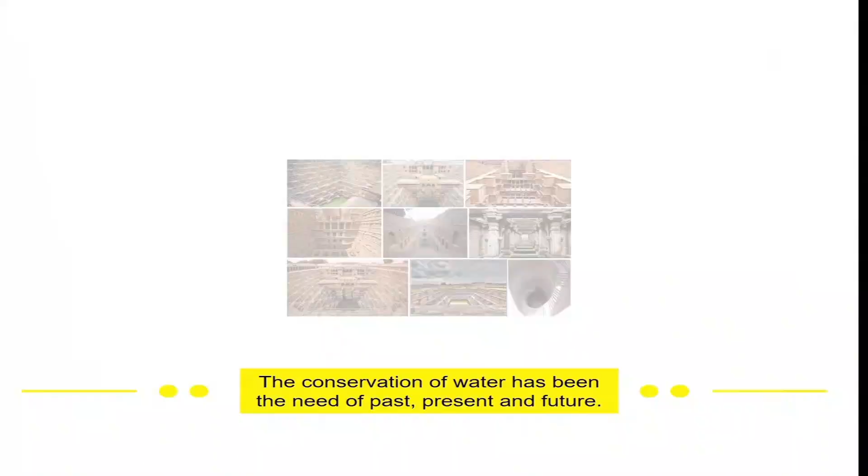Welcome to the Central Soil and Materials Research Station, CSMRS, an office under the Ministry of Jal Shakti, located in New Delhi. What is the most fundamental necessity of life? It is water, the essence of existence, the foundation of development, and the heartbeat of civilization. Water conservation has been a necessity of the past, a demand of the present, and the hope of the future.

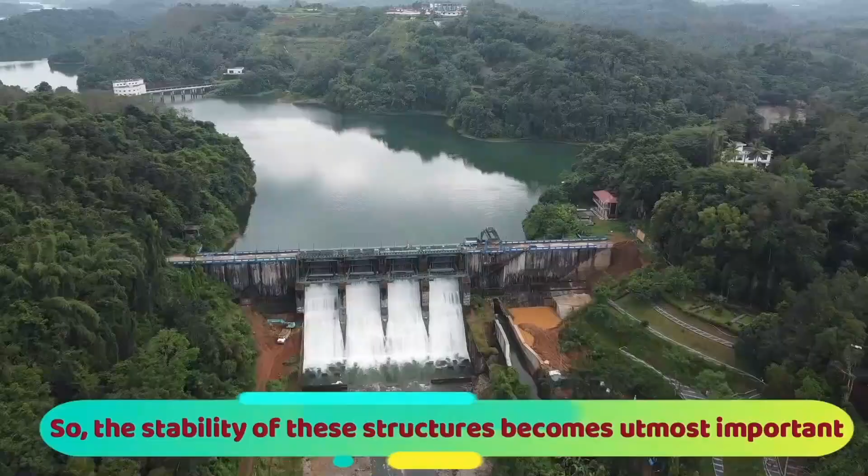To ensure the water and energy security of our nation, the stability of water resource structures becomes paramount. With this perspective, the Government of India established the Central Soil and Materials Research Station, CSMRS, in 1954 in New Delhi as the Soil and Materials Directorate of the Central Water Commission, CWC. Since its inception, CSMRS has served the nation through research, consultancy, and testing services for various water resource projects in the country and neighbouring countries.

On the recommendation of the high-level committee constituted under the chairmanship of Dr. M.S. Swaminathan, CSMRS was separated from the Central Water Commission in 1981 and made an attached office under the Ministry of Jal Shakti, Department of Water Resources, River Development and Ganga Rejuvenation.

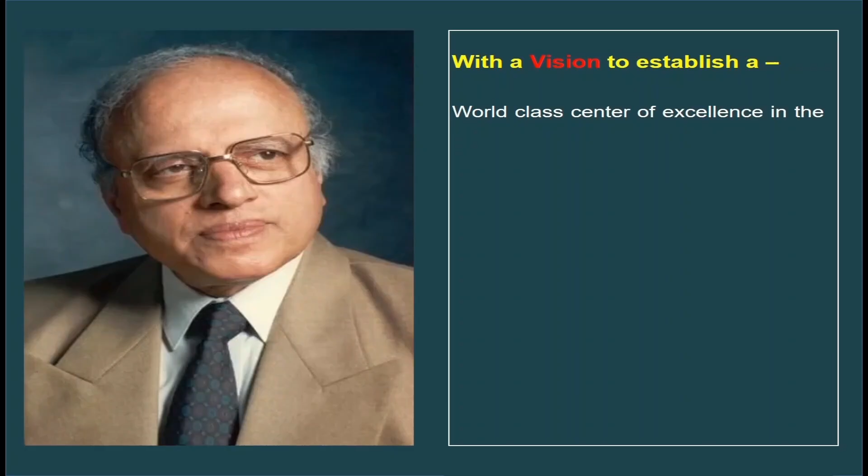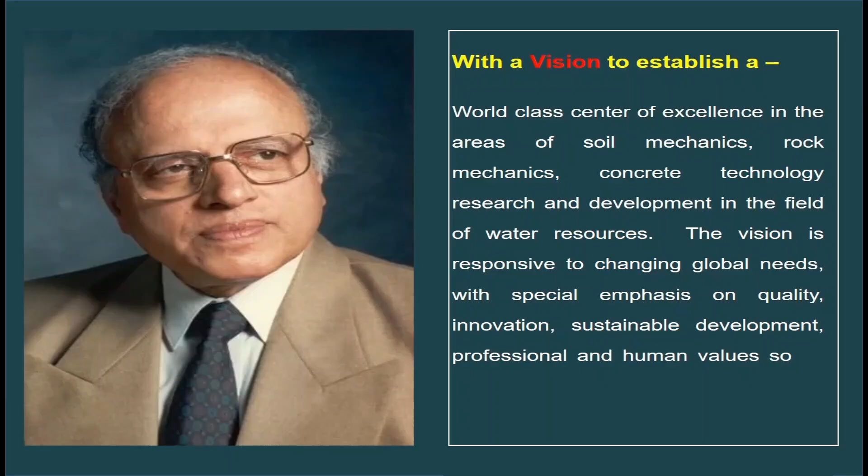The vision of CSMRS is to establish a world-class center of excellence in the fields of soil mechanics, rock mechanics, concrete technology, and water resources research and development. Its vision is to be responsive to changing global needs with an emphasis on quality, innovation, sustainability, and professional and human values, so as to make an effective contribution to public welfare and socio-economic development.

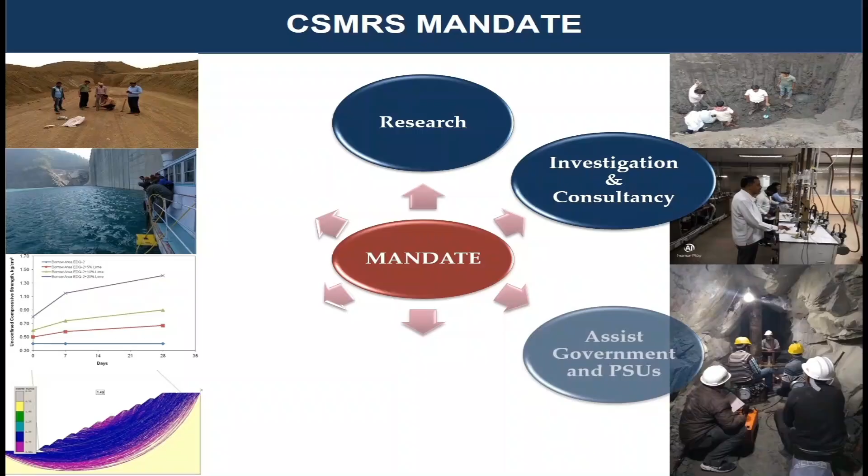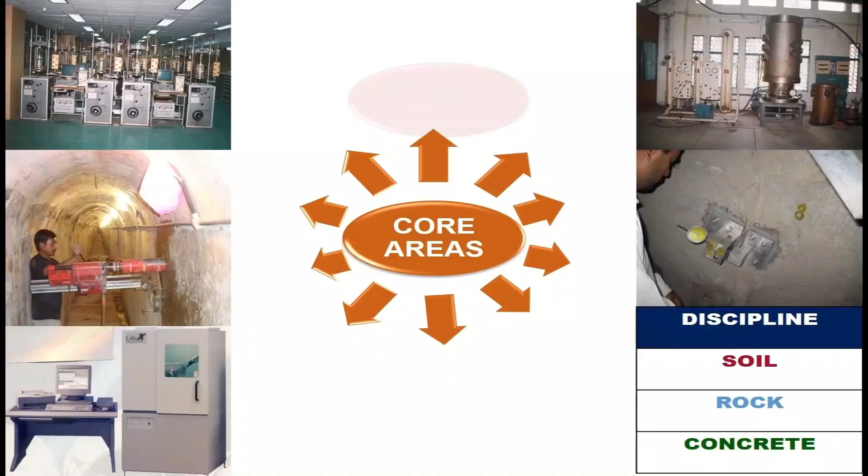The activities of CSMRS relate to research, testing, and consultancy, providing assistance to government departments and public sector undertakings. In addition, it also undertakes training, dissemination of information, and academic collaboration with universities and research institutions. The main areas of work include soil mechanics, rockfill technology, geosynthetics, soil dynamics, rock engineering, geotechnical instrumentation, concrete technology and chemistry, numerical modeling.

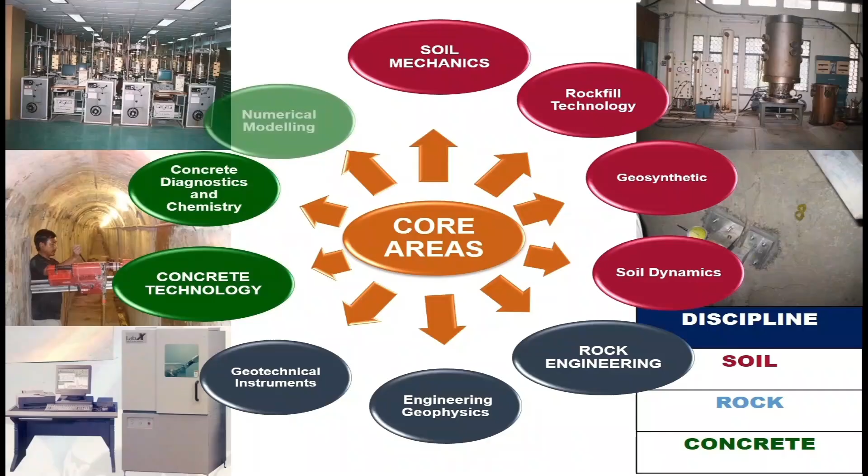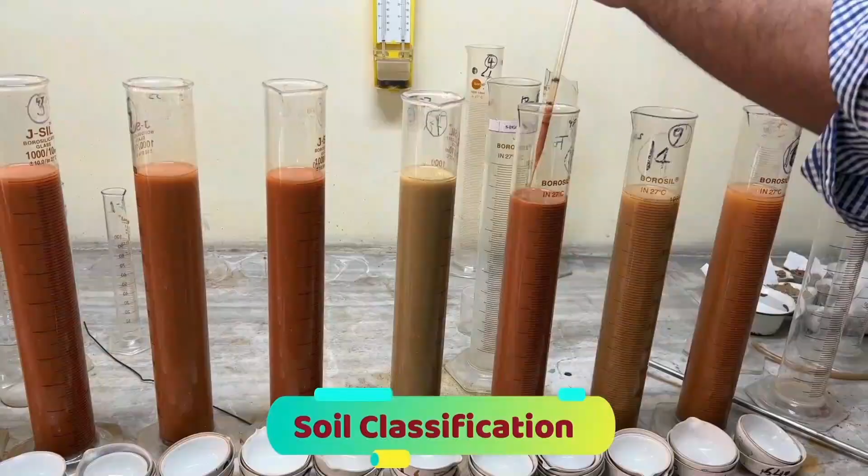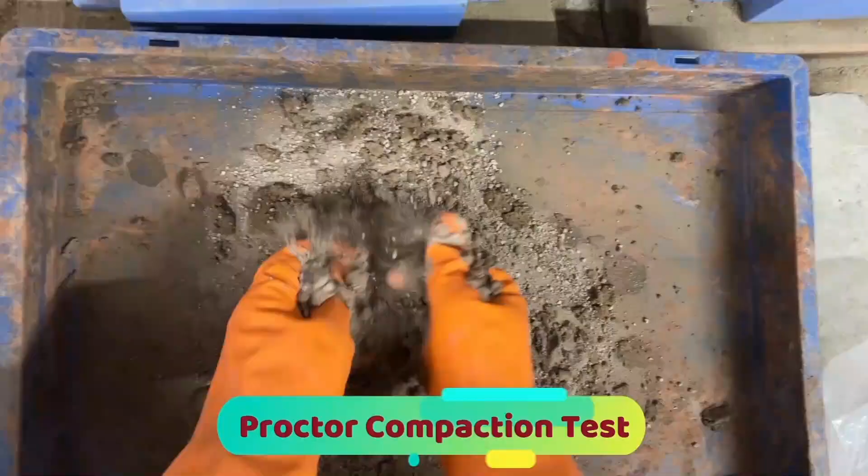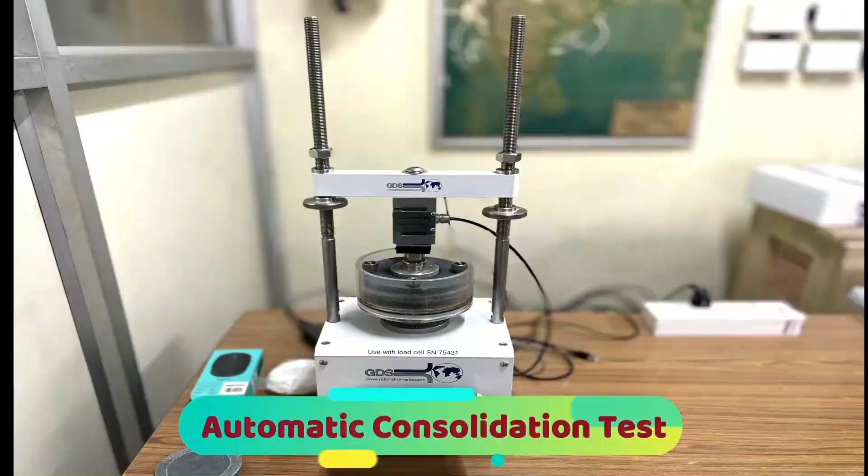The soil mechanics division focuses on the mechanical behavior and engineering properties of soil. Soil characteristics are identified through tests such as particle size analysis, liquid and plastic limit tests, and soil classification. The optimum moisture content and maximum dry density of the soil are determined by compaction tests, such as the automatic Proctor test. Soil compressibility is studied using automated consolidation equipment, which is essential for the stability analysis of dams and foundations. Digital servo-controlled triaxial tests are performed to determine shear strength.

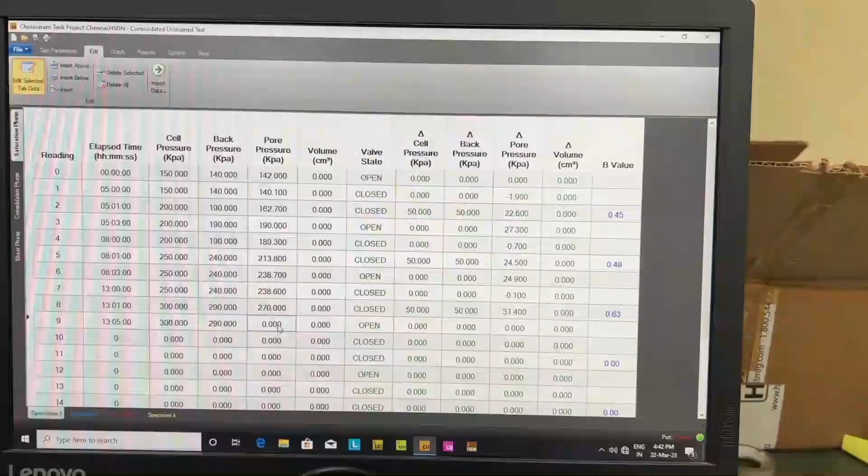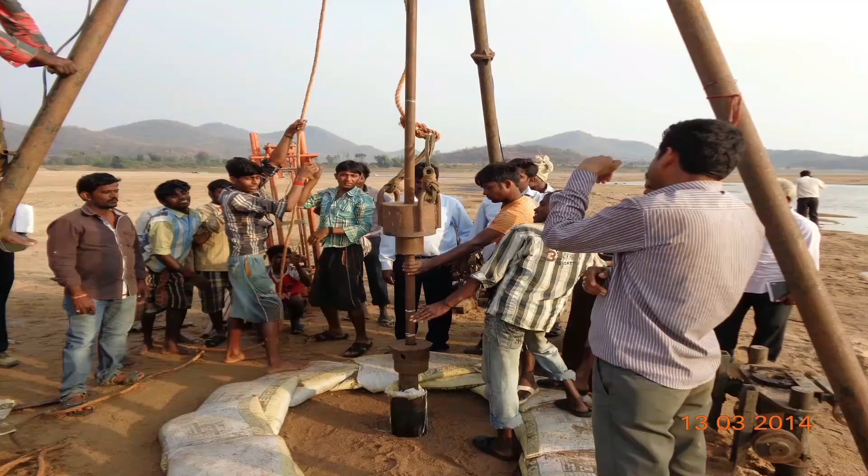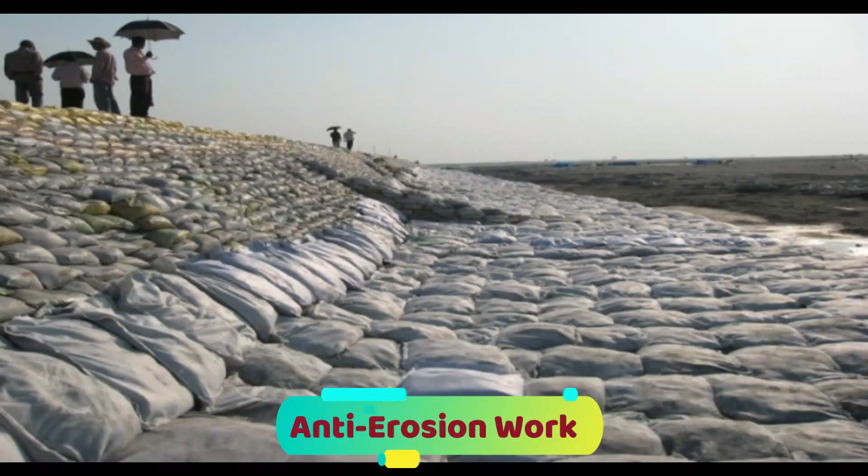Field investigations include exploratory drilling, permeability tests, plate load tests, and standard penetration tests, SPT, which evaluate the behavior and bearing capacity of the soil on site. The geosynthetics division utilizes modern materials such as geotextiles, geomembranes, geocells, and geocomposites, which aid in seepage control, filtration, drainage, erosion control, and reinforcement.

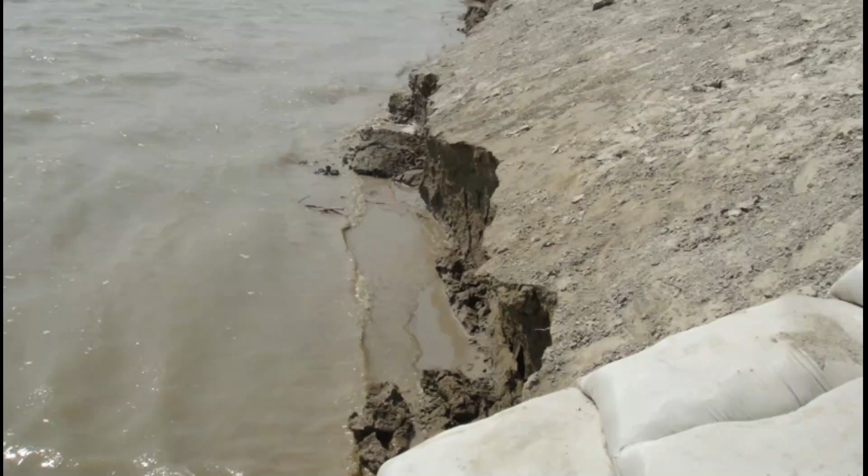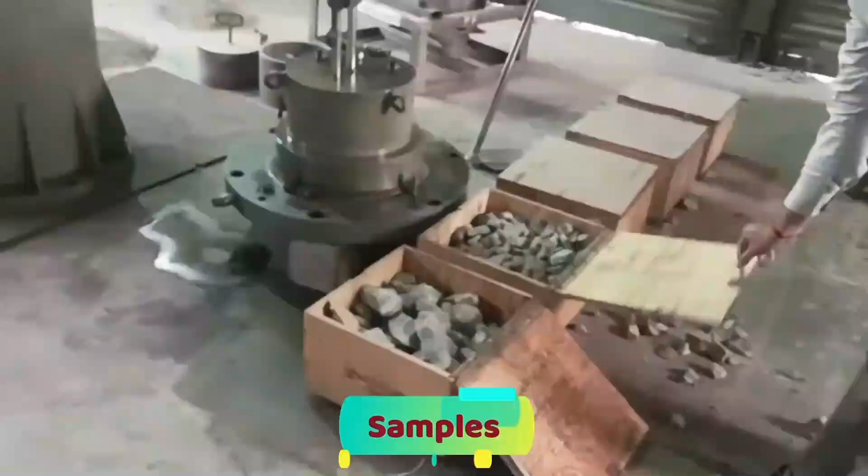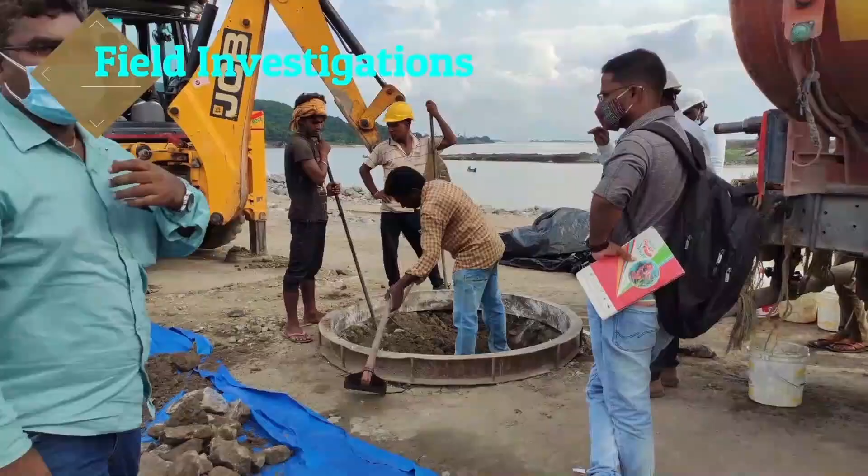The rockfill division studies the strength and deformation characteristics of rockfill materials. Model materials are tested using relative density equipment and large-scale testing devices. This division also performs quality control and health monitoring in dam projects through on-site tests such as density measurements and permeability tests.

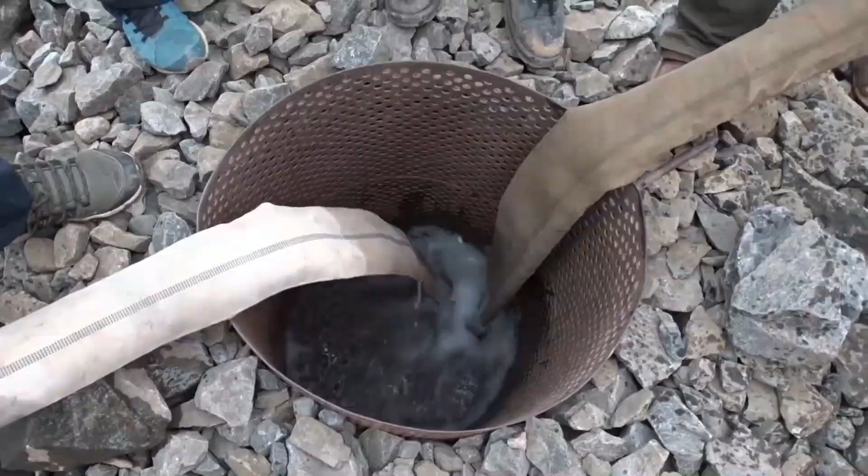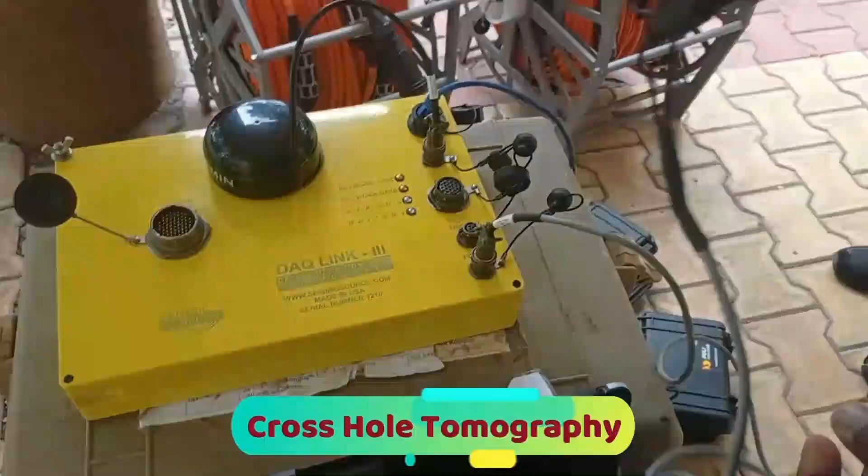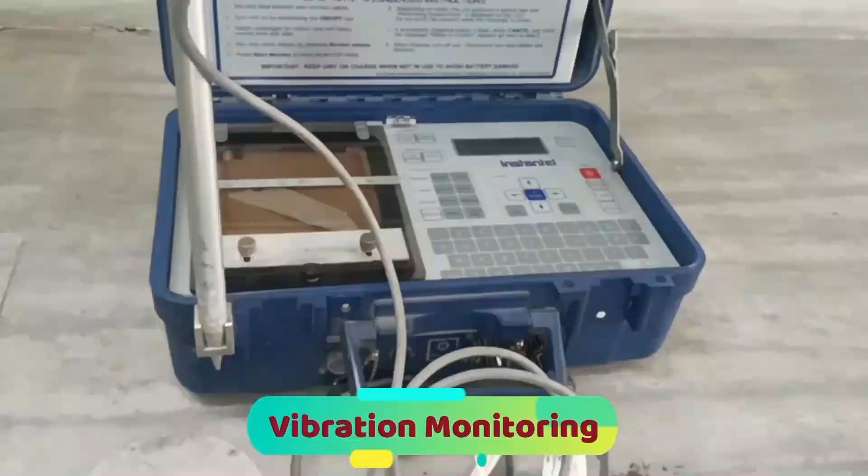The Geophysical Division is equipped with advanced instruments such as seismic refraction, MASW surveys, and cross-hole testing, which are used to determine P-wave and S-wave velocities. Resistivity imaging techniques are used to assess the properties of subsurface materials. This division also operates vibration monitoring equipment and remotely operated underwater vehicles, ROVs, for inspecting dam surfaces and underwater structures.

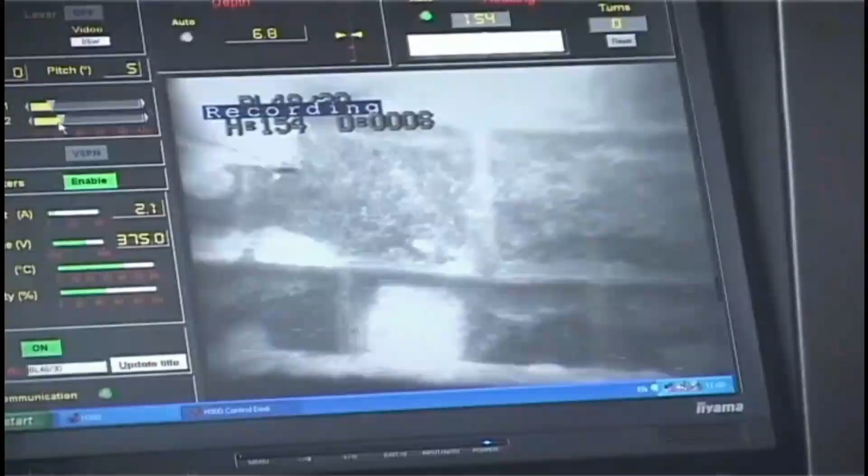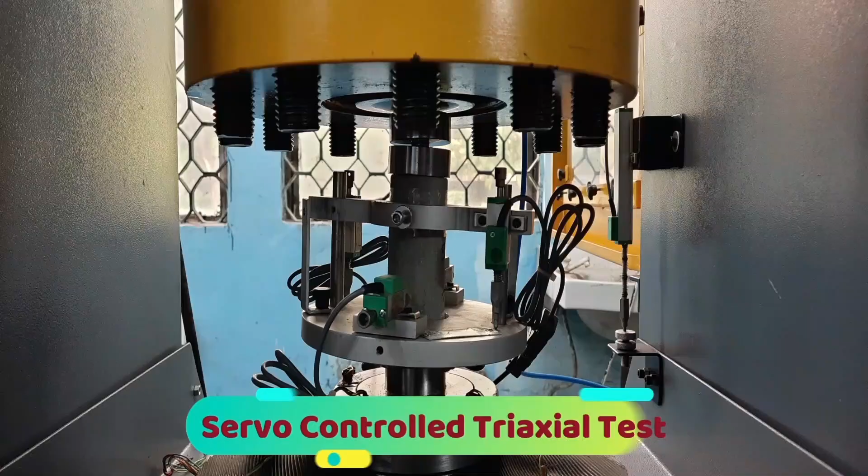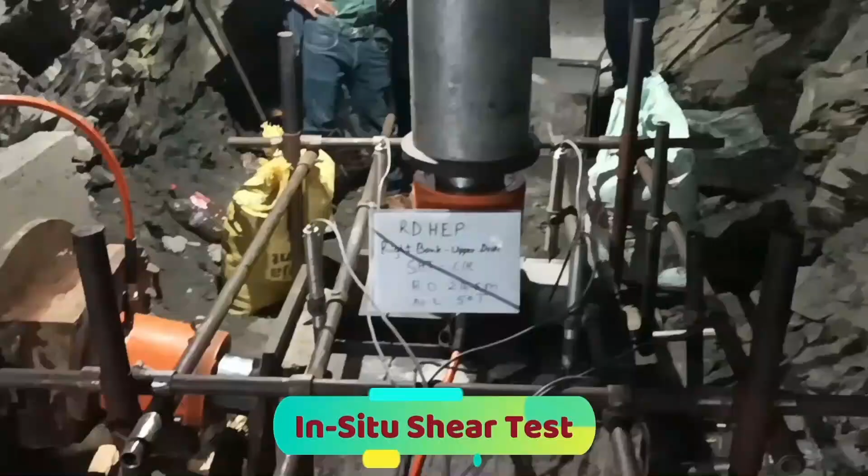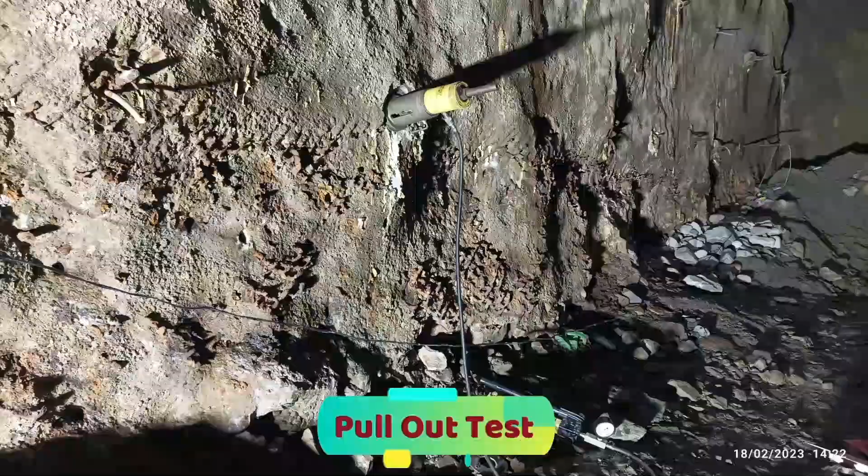The Rock Engineering Division conducts laboratory and field investigations of rocks and rock masses. These include uniaxial compressive strength, UCS, testing, triaxial compression, indirect tension, slake durability, point load, in situ stress measurements, uniaxial jacking, and direct shear tests performed for underground structures, ensuring the stability and safety of dams.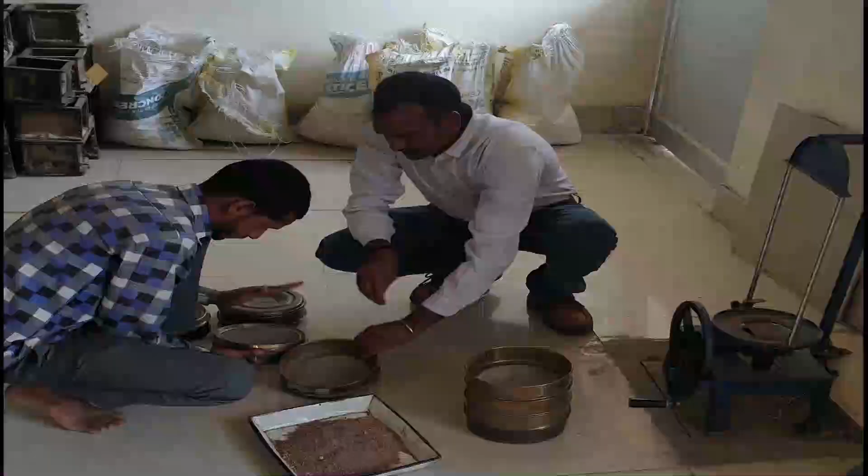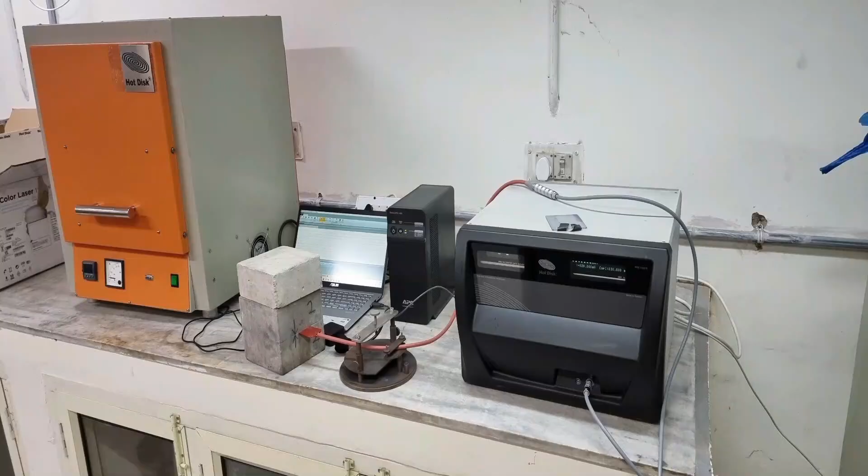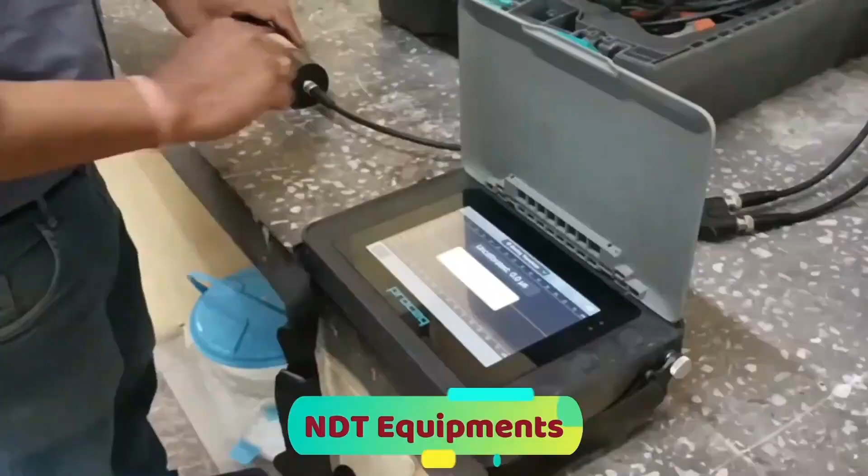The Concrete Division conducts construction material surveys, aggregate testing, alkali aggregate reactivity testing, and concrete mix design. It also provides thermal studies of mass concrete and quality control and assurance services, such as for the Polavaram project. Non-destructive testing (NDT) equipment, such as rebound hammers, ultrasonic pulse velocity meters, and half-cell potentiometers, are used to evaluate the structural integrity of concrete. The health assessment of the dam galleries is carried out with NDT equipment.

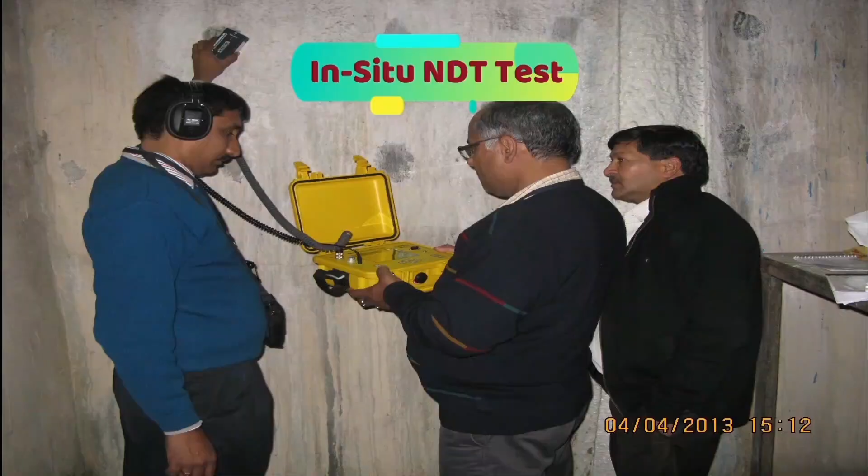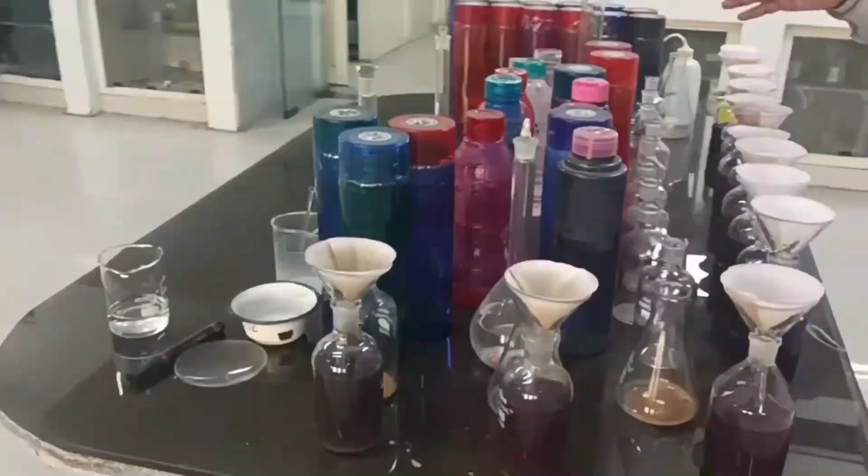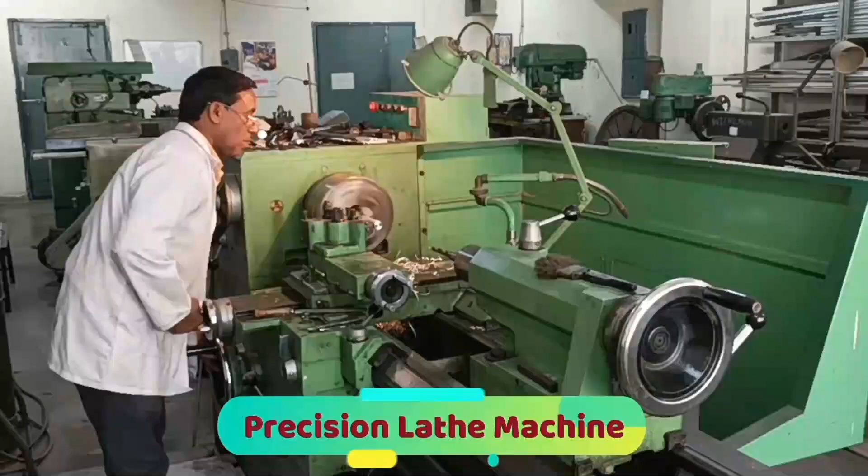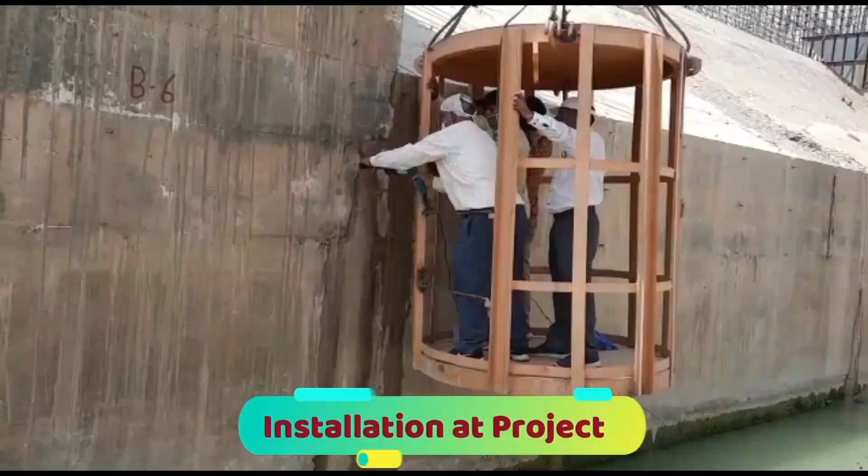The Chemistry Division analyzes the chemical properties of construction materials such as soil, water, cement, fly ash, and admixtures, using advanced instruments such as X-ray diffraction. The Workshop and Instrumentation Division manufactures precision instruments such as three-dimensional crack meters using advanced lathe and milling machines. These instruments are installed at various project sites for long-term performance monitoring.

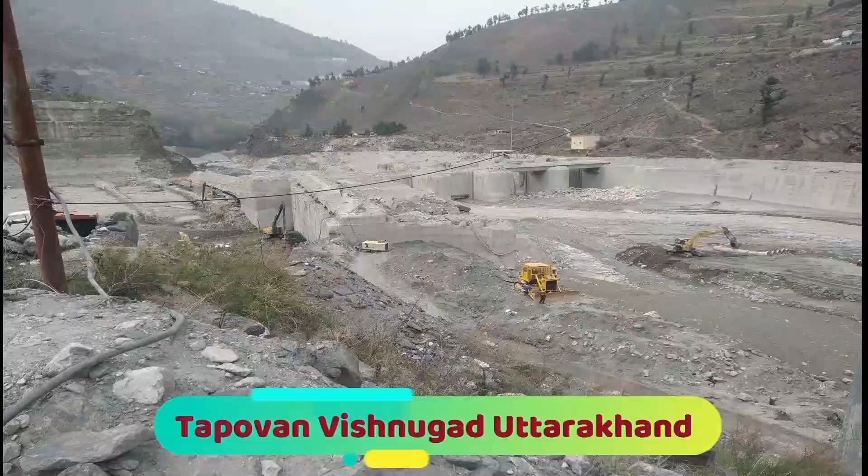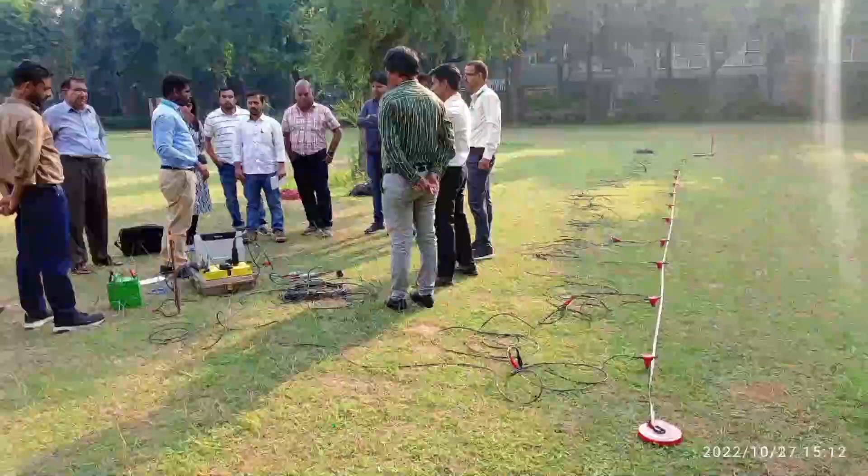CSMRS also undertakes forensic investigations, contributing to studies on critical incidents such as the Gharra Dam, Tapovan Vishnugad project, and Dharchula landslide in Uttarakhand. To promote knowledge sharing, CSMRS organizes annual training programs featuring expert lectures, laboratory sessions, and field demonstrations for engineers, researchers, and students.